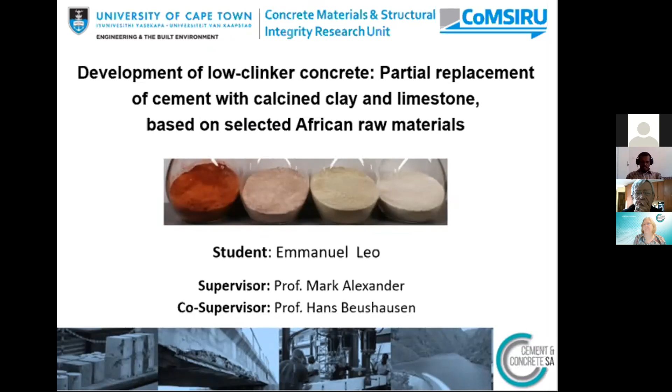So what is LC3? LC3 stands for limestone calcined clay cement. It means a mixture of limestone, calcined clay, and cement.

In the literature, you'll see most people researching a mixture of 50% clinker, 30% calcined clay, and 15% limestone, and of course there's also 5% gypsum. But depending on the required performance of the mix, you can even go down to 40% clinker. And you don't need high-grade kaolinitic clay, a clay with about 40% kaolinite content is usually enough.

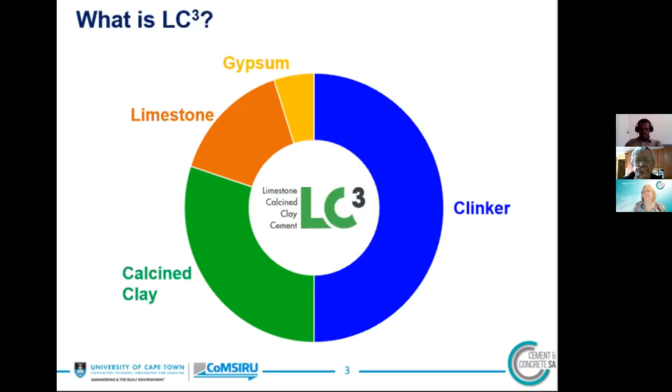So in general, proper preparation and optimization of these constituent materials is important. Otherwise, you may end up having a system with poorer performance than the conventional systems.

So why do we need this system? We all know that the production process of Portland cement generates about 900 kilograms of carbon dioxide per ton of clinker. Fossil fuel combustion is responsible for about 40%, and the decomposition of limestone is responsible for the rest. So for environmental reasons, calcination of limestone must be minimized to reduce carbon dioxide emissions.

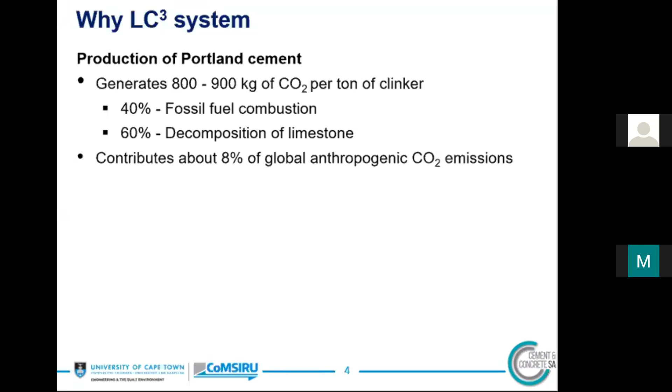Currently, it is estimated that the production of cement contributes about 8% of global anthropogenic carbon dioxide emissions. And about 40% of cement that is produced globally is used to make concrete.

Now, according to the United Nations, the proportion of people in Africa living in urban areas is expected to reach 56% by 2050. So that will result in an immense demand for urban infrastructure, such as bridges, housing, and sewage networks. And most of these structures are usually made of concrete, as it's a relatively low-cost construction material. So this will mean more production of cement and therefore more carbon dioxide emissions.

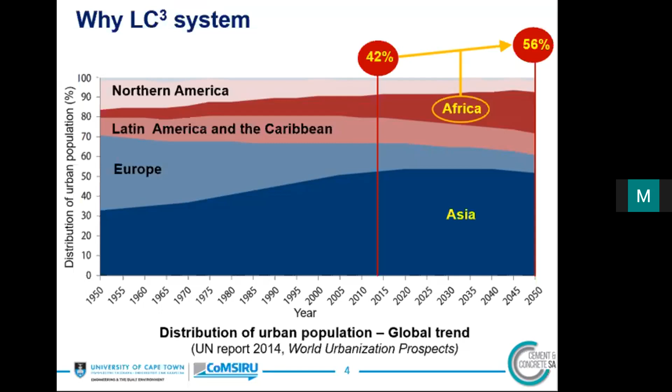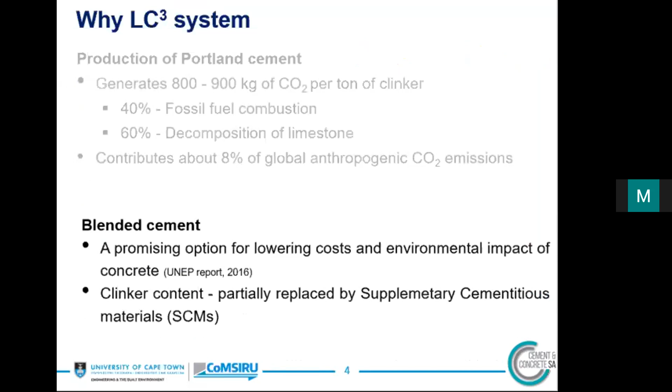Now, the promising option for lowering cost and environmental impact of concrete is through the use of blended cements, which reduce the clinker content in the cement by replacing it with supplementary cementitious material.

Now, the most widely used supplementary cementitious materials, slag and fly ash, are limited worldwide, especially in most African countries. In South Africa, there are large amounts of fly ash generated by burning coal to produce electricity. However, the burning of coal to produce electricity is also another source of carbon dioxide emission.

Now, due to the increasing pressure to reduce environmental emissions, in the long term, the availability of fly ash is also in doubt. Also, the Saldanha Steel Plant in the Western Cape ceased to operate in 2020, meaning that there is no longer furnace slag in that region. So in this case, it is important that we start to think about alternative materials before it's too late.

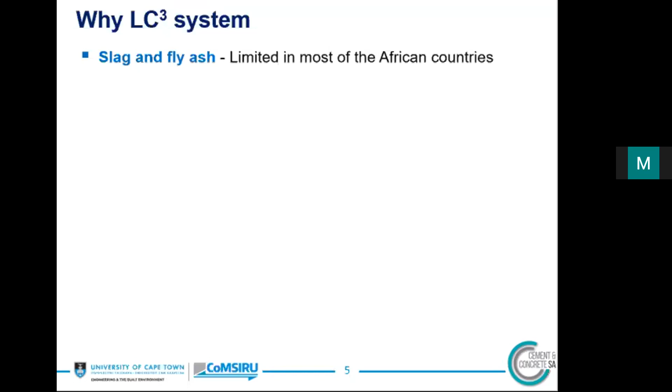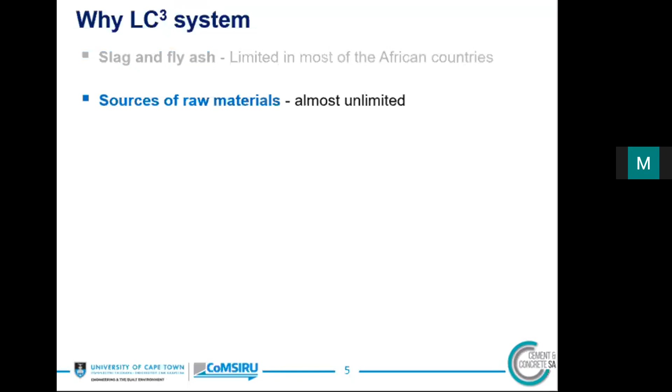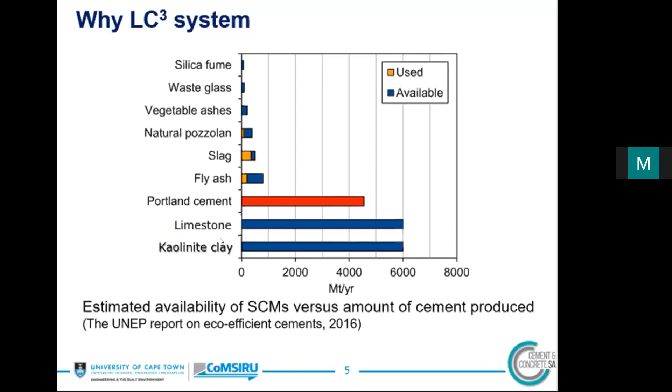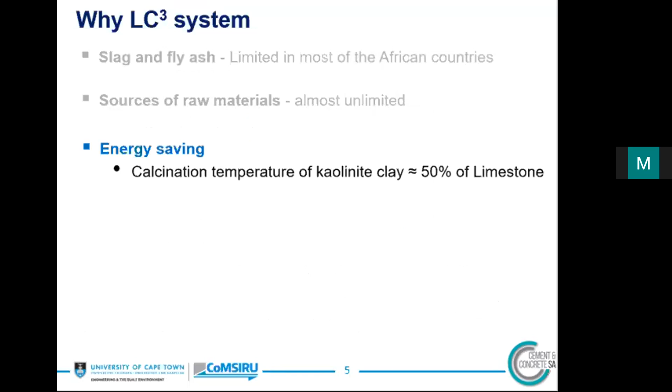Number 3 is about energy saving. Now, in this system, energy saving occurs because the calcination temperature of clays is lower than that of limestone by almost 50%, and they're also easy to grind. There's also a strong chemical synergistic effect when all these 3 materials are combined together, but should be in the right proportions and the right sulfate and alkali content.

So in general, the increased compressive strength and the penetration resistance of this system is linked to the porosity refinement produced by the pozzolanic reaction and formation of carboaluminate phases.

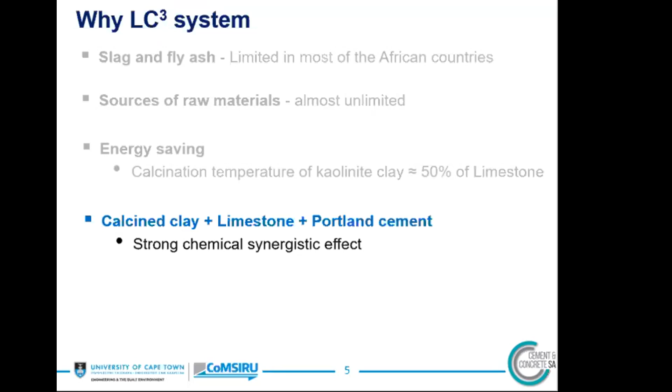Lastly, studies done in India and Cuba show that it can reduce more than 30% of carbon dioxide emission. This is mainly because the burning of kaolinite clays emits only water vapor, unlike limestone, which emits a greater quantity of carbon dioxide during the clinker production.

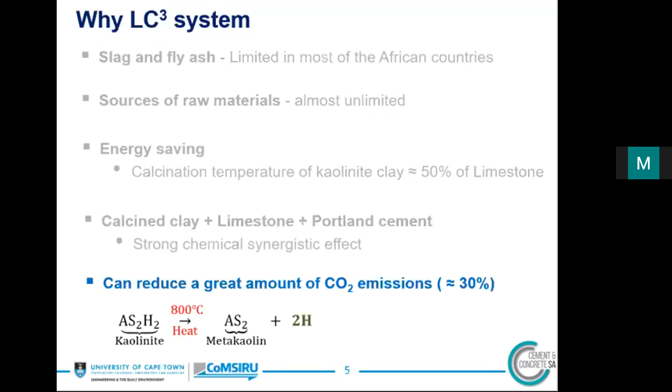So the main objective of this work was to use a performance-based approach in the development of low clinker concrete while maintaining the required properties of workability, compressive strength, and durability for structural applications.

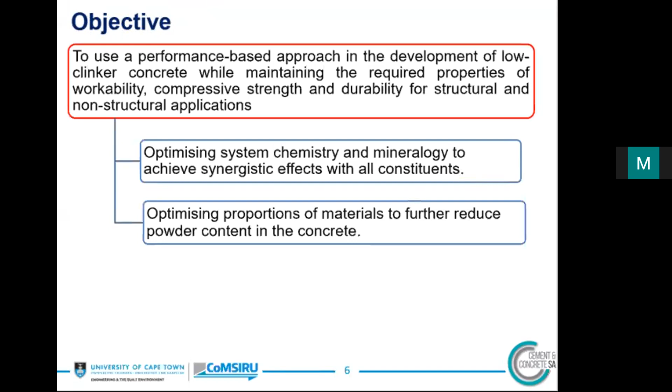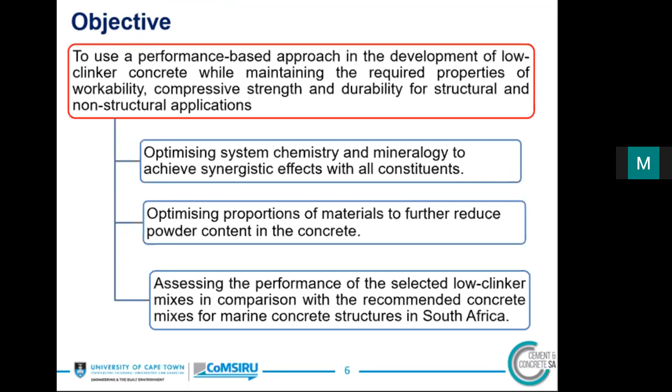Now, to attain the main objective, the study aimed at optimizing system chemistry and mineralogy to achieve synergistic effects with all the constituents, optimizing proportions of material to further reduce powder content in concrete, and assessing the performance of the selected low clinker mixes in comparison with the recommended concrete mixes for marine concrete structures in South Africa.

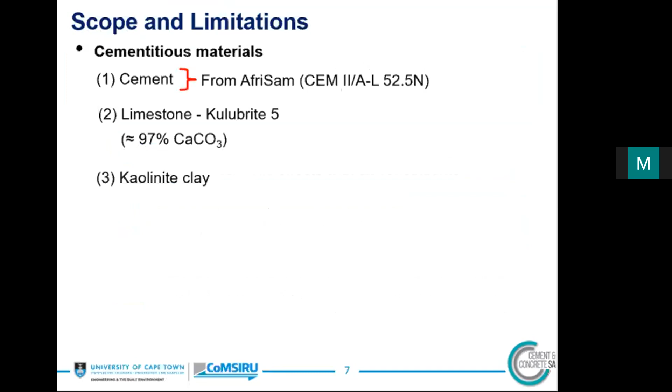The cementitious materials considered in this study are cement, limestone, and kaolinite clay. Cement is CEM II/A-L 52.5N from AfriSam. The limestone is Kulubrite 5 from Idwala Carbonates, which has about 97% calcium carbonate, and there are 2 samples of clay from South Africa and 2 samples of kaolinite clay from Tanzania.

Two water binder ratios were considered: 0.4 to represent relatively high performance concrete from marine environments, and 0.55 on selected mixes to represent medium quality concrete, which can be used in most common construction projects.

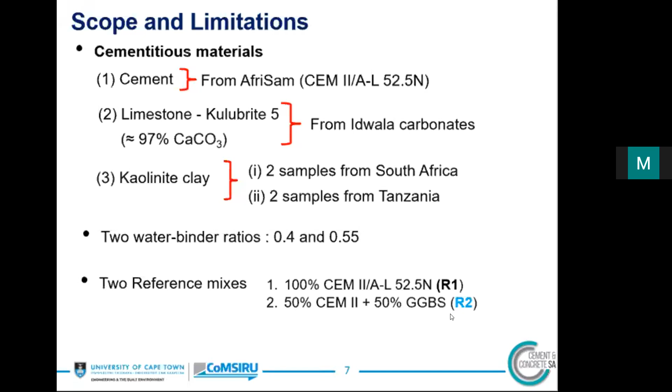Two reference mixes were considered. One is with 100% CEM2, abbreviated as reference 1 or R1. The second mix is with 50% CEM2 replaced by GGBS, abbreviated as reference 2 or R2. A superplasticizer called Optima 175 from Chryso was also used to improve workability.

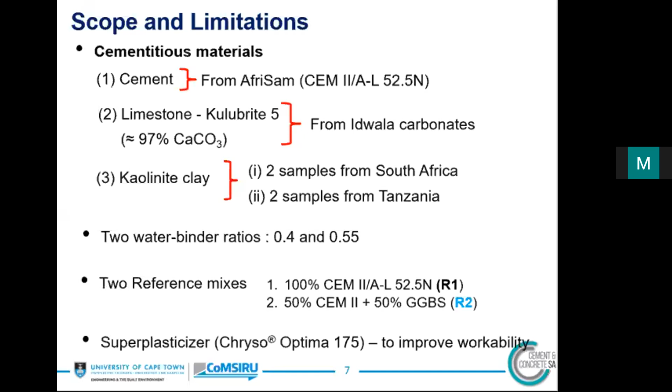The first task was to identify potential kaolinite clay deposits in South Africa and Tanzania and get clay samples from these deposits. Because of the amount of clay at the deposits, the potential ones in South Africa are the Bronkhorstspruit deposit, abbreviated as B clay, the Grahamstown deposit, abbreviated as G clay, and the Hopefield deposit, abbreviated as H clay.

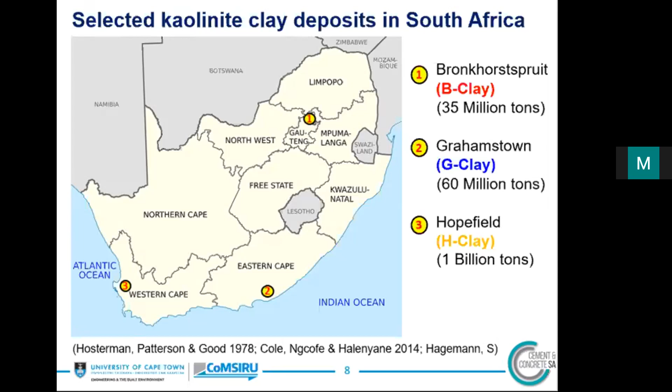This is what the clay samples look like. On the left side, you have samples from South Africa, and on the right side, samples from Tanzania.

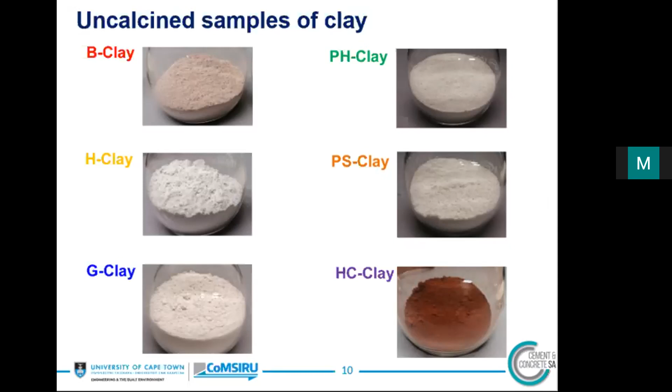The second task was to check the suitability of these clays and the optimal calcination temperature. This involved XRF, XRD, TGA analysis, and also reactivity tests. This table shows a summary of the XRF, XRD, TGA, and calcination temperature results. Basically, a suitable clay is one with alumina content greater than 18%, alumina to silica ratio greater than 0.3, and loss on ignition greater than 7%.

But what's most important is the kaolinite content, which has to be at least 40%. Based on these results, we decided to select B clay and H clay from South Africa, and PH and HC clay from Tanzania for further work.

Something to note here is the equivalent alkalis in the selected clays. You can see the equivalent alkali of the H clay is very high compared to other selected clays, so this will obviously affect the performance of the LC3 mixes with H clay.

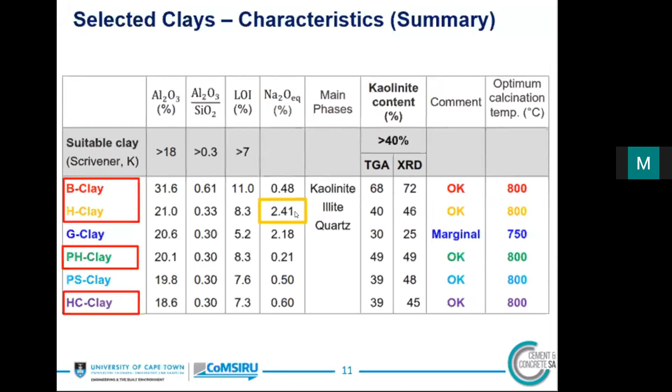This figure and table show the particle size distribution of the selected clays after grinding. The target was to achieve D50 less than 10 microns and D90 less than 30 microns before calcination. But during calcination, the particles tend to agglomerate, which is why you see an increase in particle size.

Another important parameter is the BET surface area of the clay. The surface area, which includes the internal surface area, was estimated using the Brunauer-Emmett-Teller equation based on nitrogen gas adsorbed on the surface of the clay, using an instrument called TriStar. This surface area also gives an idea of the internal surface area of the clay, especially if you have similar particle size distribution.

It's clear here that HC clay has the highest internal surface area compared to other clays, and H clay has the lowest. So in this case, a mix with HC clay would demand more water or more SP to achieve a similar workability.

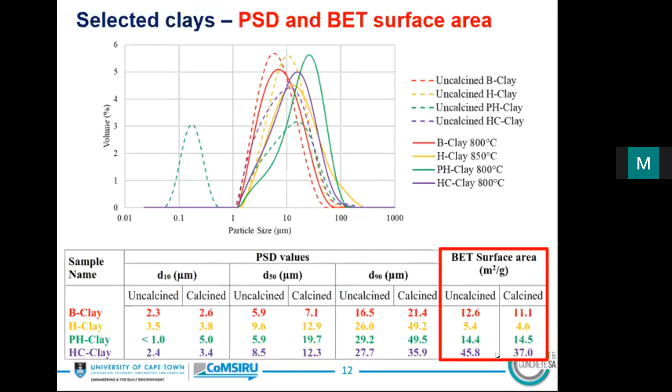The next task was to get optimal proportions of these materials. Here, the compressive strength of mortar was used as the performance metric for optimization. LC3 mixes with clinker levels between 40 and 70% were obtained using the mixture design three-factor approach. In this approach, the simplex shape is a triangle, and it's possible to come up with contour lines within the triangular regions, as shown in these diagrams, to estimate proportions that give the best performance.

This system requires adjustment of sulfate and alkali content. Sulfate is adjusted due to the filler effect of the added supplementary cementitious materials, in this case calcined clay and limestone. To get full benefit of the reaction of both silicate and aluminate phases, adjustment was done by ensuring the aluminate reaction peak occurs shortly after the silicate reaction peak, between 13 and 18 hours.

This was done using an isothermal calorimeter available in our lab. Alkali content is adjusted to increase the early strength, while ensuring the long-term performance of the mix is not affected. Literature suggests a value between 0.6 and 0.8%. In our case, we decided to select 0.7%.

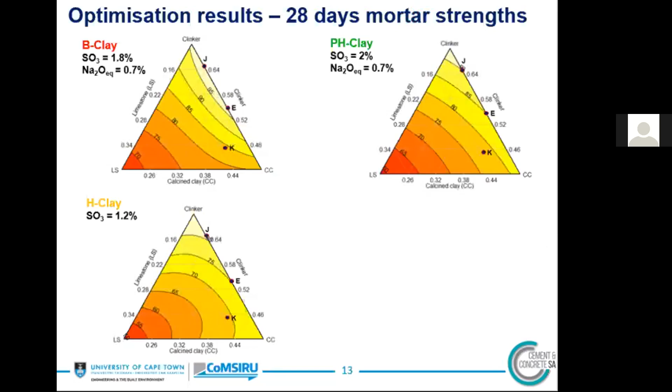Now, with these two adjustments, sulfate and the alkali content in all the mixed proportions, it's only now the amount of clinker, amount of calcined clay and limestone that control the reaction. This figure shows optimization of results at 28 days. You can also see the required sulfate for each of these mixed proportions.

For mixes with B clay it was 1.8%, with PH clay 2%, but H clay was only around 1.2%. The equivalent alkalis were maintained at 0.7% by adding sodium hydroxide, but it was not possible for mixes with H clay because the alkalis in H clay were already high. So what you see inside here are the compressive strength results of the LC3 mortars relative to the reference mix with 100% cement.

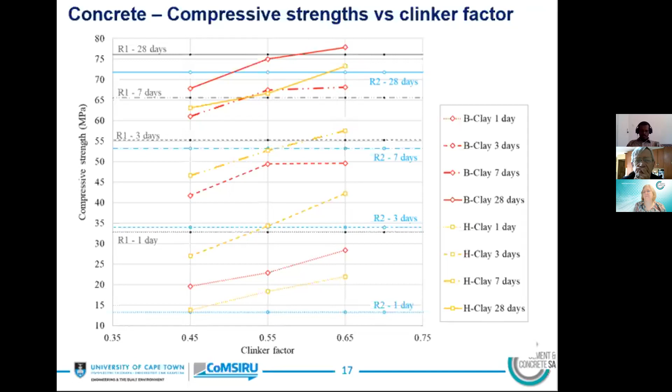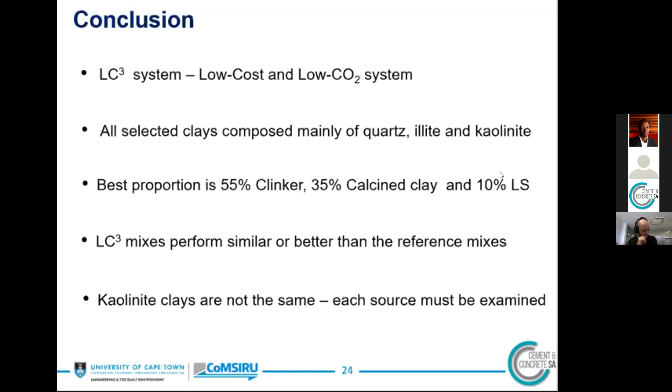This clay we received was already flash calcined by the supplier, Cowling Group. So we received it already calcined and had to use it directly. But when we tried, because they also gave us a small sample of raw clay, we also tested it at 800 to check the activity. But the activity was similar, almost the same.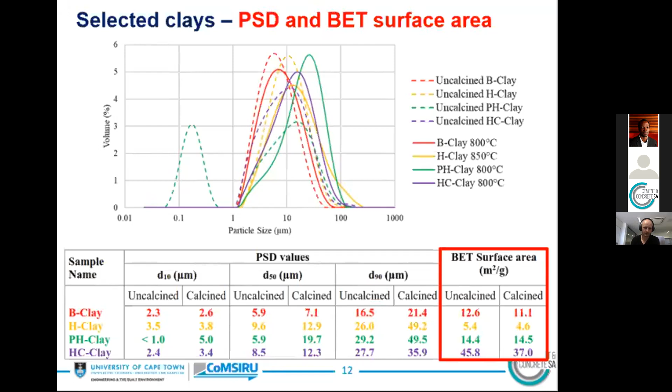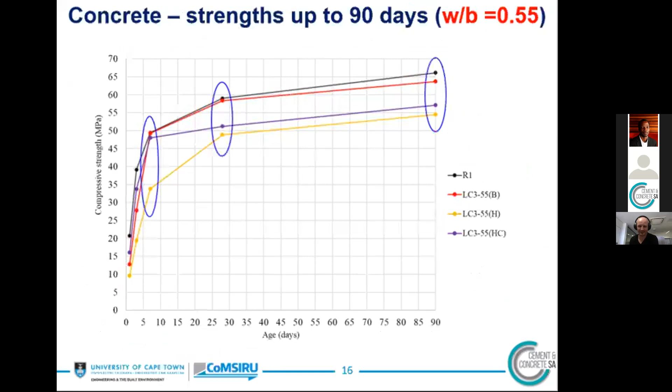Okay, in slide number 18, Emmanuel. 18. Nick, if I'm taking too much time, you can let me know. No, that's fine.

Now, can you please tell us, you say that the porosity values on the lower right-hand side for your LC3s are lower than that of the reference mix, but that's not the case in terms of interpretation if you look at the water sorptivity. Why is that so? The porosity of the reference mix is relatively higher than that of the LC3 mixes, but on the other hand, the water sorptivity index for the reference mix is lower than that of the LC3 mixes. How do you combine these two parameters?

If I have to be conservative in answering that question, I'll just rely on the porosity results, because the sorptivity values involve a lot of errors when you do that testing. But generally it gives you an idea of how your specimen absorbs water, how water gets absorbed when your specimen is exposed to water. So I think I'll just generally rely on the porosity results.

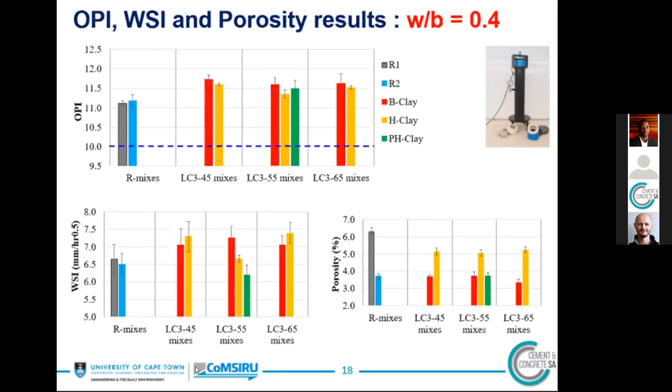Now, don't you think this brings into question the validity of these results in terms of the edge effect? I don't know whether you've considered the edge effect in terms of resistance measurement - edge as in E-D-G-E, not A-G-E, I can't differentiate the pronunciation of these two.

So you're saying that there must be an error, but if there's an error, then it is maintained throughout testing of all the specimens. That's a very risky statement to make, that even if there's an error, it's still the same in all of them.

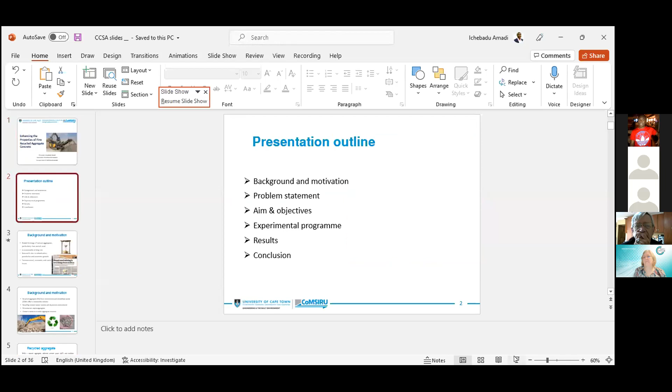Sorry, is my slide moving? No, it doesn't look like it, it looks like it's frozen. Just press enter on your keyboard. I've done that, nothing. Let me start sharing again. Is it better now? Yeah, we can see.

Sorry about that. So here's an outline of my presentation. I'll start with the background, talk about the problem statement and aim and objectives, the experimental program, discuss some of the results so far, and then I'll conclude.

There is a global shortage of natural aggregates, particularly river sand and pit sand. This is because sand is mined at a rate that presently exceeds the rate at which sediments are deposited by all the rivers of the world. It is estimated that about 40 to 50 billion tons of sand is extracted from the earth per annum.

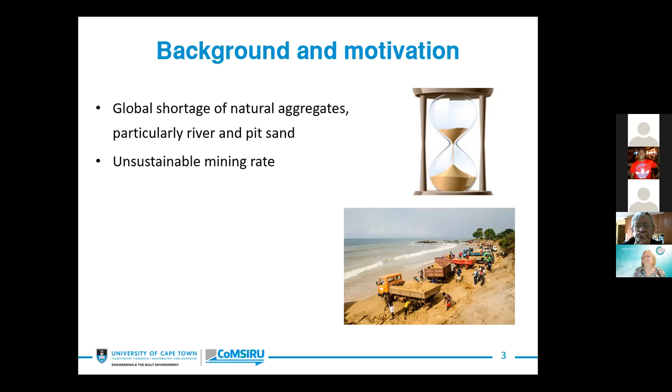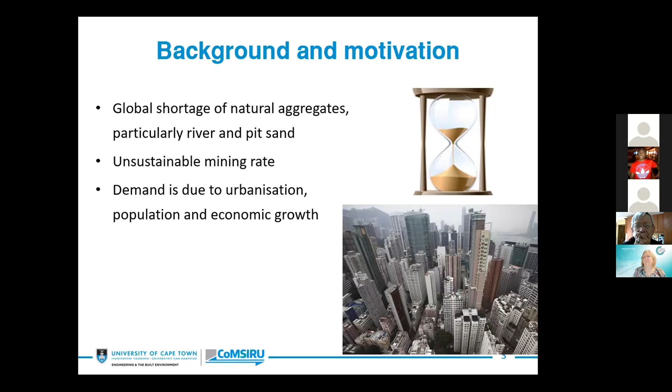A significant portion of this goes into cement and cementitious materials production, that is concrete and mortar. The demand for concrete and mortar is fueled by urbanization, population growth, and economic growth. Of course, this high demand has come at a huge cost, as it has created environmental and socioeconomic issues, which include loss of biodiversity, coastal erosion, and in some cases, sand wars.

One way of sustainably addressing these issues will be the use of recycled aggregates from the concrete component of construction and demolition waste. Some benefits of recycled aggregates include waste reduction, especially as landfills have become scarce, particularly within the Cape Town context. Another benefit is conservation of natural aggregate resources, environmental protection, and of course, job creation as well.

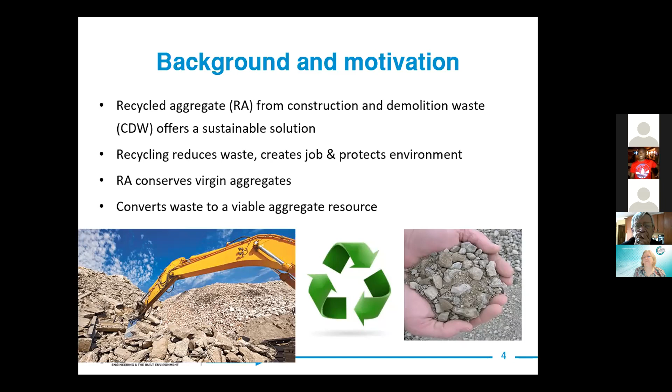Here's a picture of recycled aggregates. Recycled aggregates can be idealized as constituting virgin aggregate and old adhered cement mortar. The old adhered cement mortar comes from the old concrete that was crushed to produce the recycled aggregates. Between the old adhered mortar and the virgin aggregate, there is an interfacial transition zone. The old adhered mortar looks porous and is less stiff than the aggregate component. For this reason, recycled aggregates usually have high water absorption, and they are usually less stiff and less dense than conventional or natural aggregates.

When this recycled aggregate is used in the production of new concrete or mortar, there's a new cement paste that bonds with the recycled aggregate, and this creates more ITZs. As we know, the existence of multiple ITZs can impact durability as the transport properties of concrete are raised.

The challenge of recycled aggregate is more with fine recycled aggregates than coarse recycled aggregates. This is because the adhered mortar is significantly more in fine recycled aggregates than coarse recycled aggregates. As a matter of fact, the percentage of adhered mortar increases as aggregate size reduces.

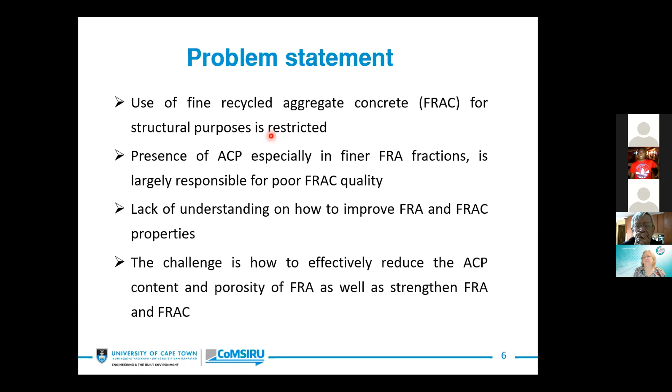Now, the aim of this research will be to investigate procedures to enhance properties of FRA for structural application in concrete production as a large-scale replacement for natural sand resources.

Here are some objectives of this study. One would be to improve FRA quality by reducing the overall ACP content through the systematic replacement of FRA particle sizes less than 1.18 with natural sand.

Secondly, we want to also reduce the porosity and strengthen FRAC through the use of supplementary cementitious materials, as well as compare the effects of these different supplementary cementitious materials on the concrete properties, to investigate the underlying mechanisms that result in the changes in porosity and microstructure of FRAC and the effect of these changes on FRAC quality.

Then we also want to look at how to optimize FRAC performance using different procedures such as mix design, mix procedure, and of course, curing. Then finally, we want to also determine the effect of different FRA replacement levels on concrete properties.

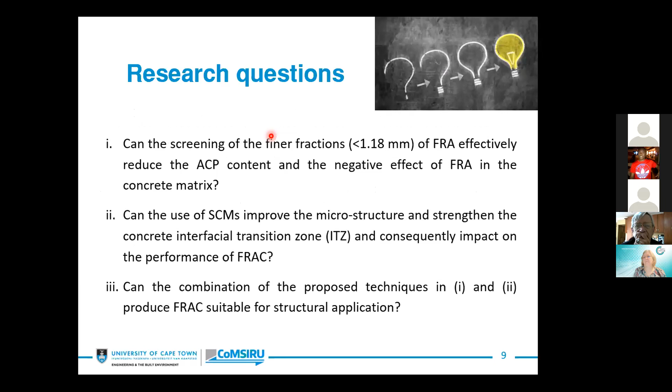Now, here are some research questions, but the underlying research question here is that, can a combination of screened aggregates and the use of supplementary cementitious materials produce fine recycled aggregate concrete suitable for structural application? To investigate this,

Here are some variables and parameters that have been listed for these studies. Now we have two water binder ratios, that is 0.45 and 0.55. These water binder ratios represent typical water binder ratios used for structural concrete application.

Of course, I've mentioned two FRA sizes. So the screened one is listed as FRA1 and the second one is FRA2. Then we also want to look at three different supplementary cementitious materials, namely fly ash, GGBS, and limestone calcined clay, which my colleague just talked about.

But for the purpose of this presentation, we shall be focusing on fly ash and GGBS. And the fly ash and GGBS will be used at 30% and 50% replacement levels, respectively. Of course, these are adopted from industry replacement levels. Then, of course, fine aggregate replacement levels will be investigating 0, 25%, and 50%.

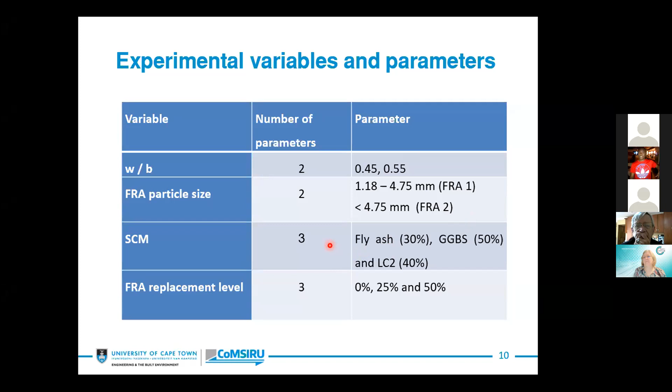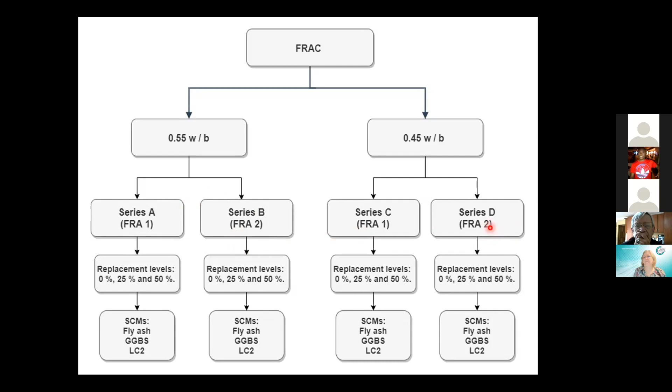Here is a flowchart of this research. Just for emphasis, Series A and Series C mixes will have screened aggregates, while Series B and Series D mixes will have unscreened aggregates, that is everything less than 4.75 millimeters.

Now, for the purpose of this presentation, we shall be limiting our discussions to general materials characterization. We shall also be talking about the compressive strength and elastic modulus, just as a representation of the mechanical properties. Then for durability properties, we shall be looking at the DI test, which is the OPI, the CCI, and the WSI.

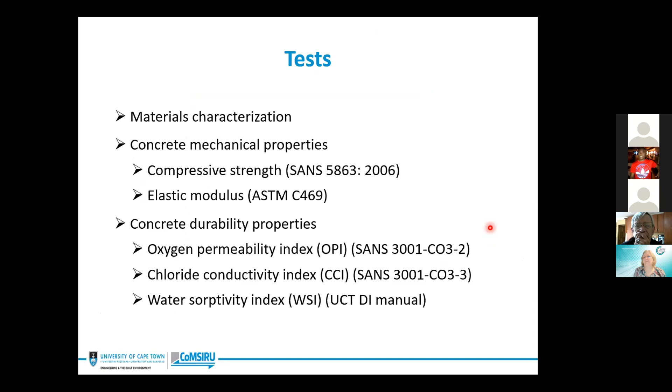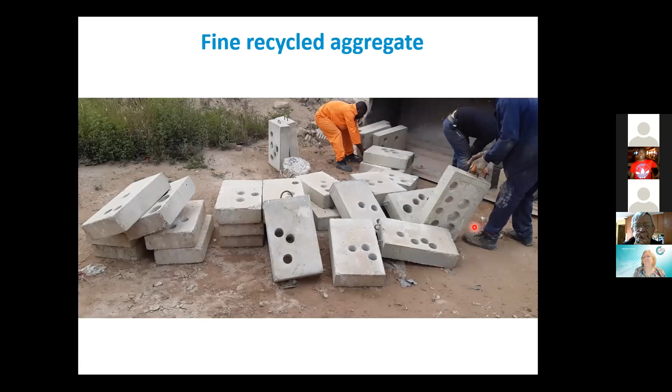You can see the coring there. And some of them were tested, and these are just a representation of the average strengths. So we can see that the strengths typically vary between 37 megapascals and 75 megapascals.

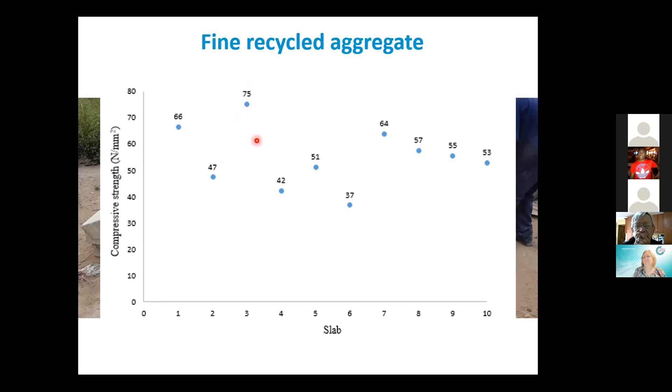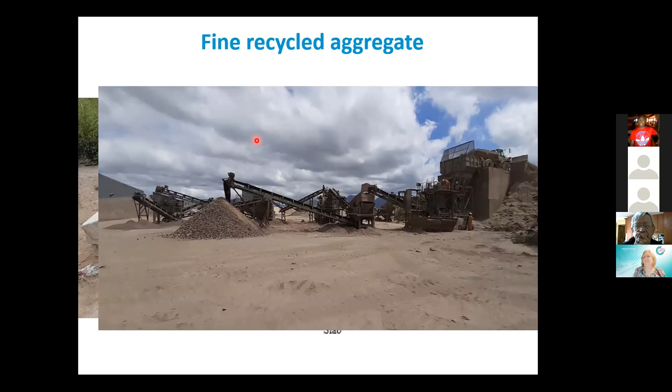This is what my materials look like after crushing. And of course, after processing, after sieving, these are the two fine recycled aggregate samples that were used.

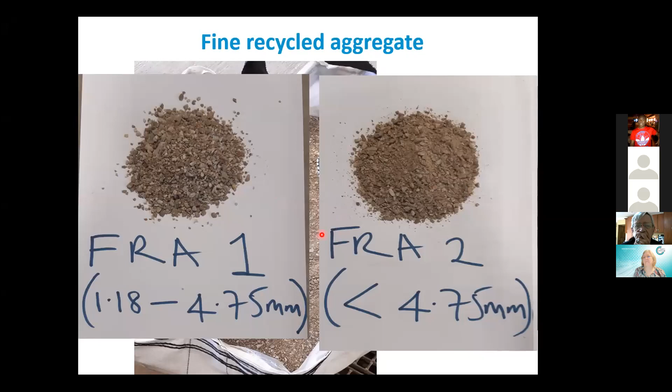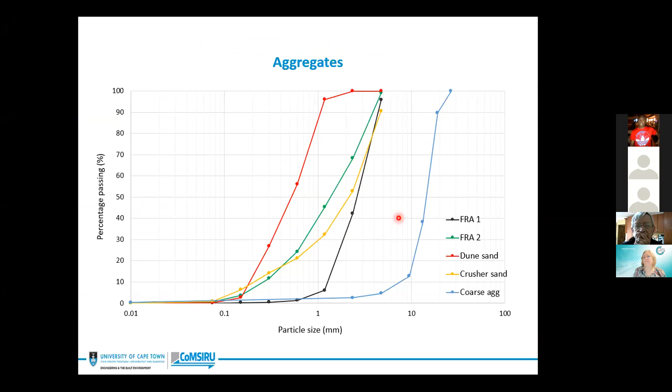Of course, our materials had to also be characterized by grading. And here is a look at all the fine aggregates that were used, both natural and recycled aggregates. And of course, this is the coarse aggregate, which is the natural coarse aggregate, the Greywacke stones.

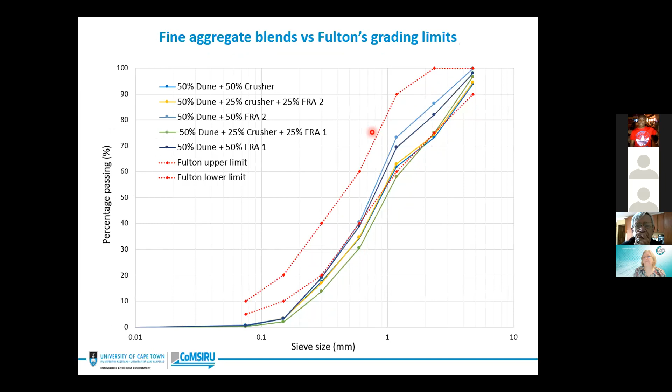We also checked them against the grading limits that were stipulated in Fulton's textbook. It is observed that the aggregates do not entirely fit in here. This is because the Fulton limit is narrower and has a finer grading than the ASTM limits.

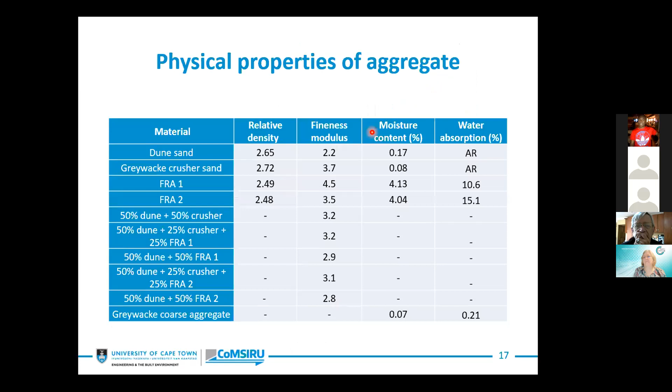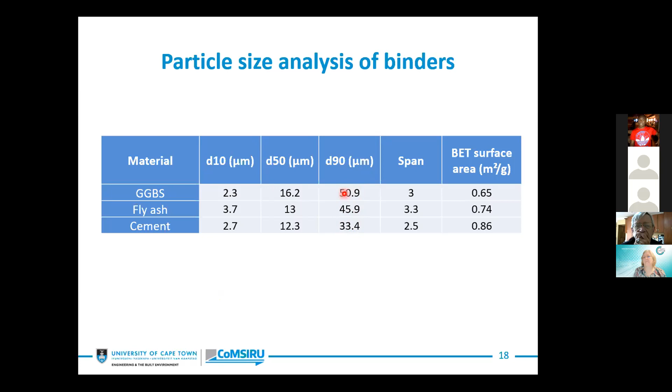Here are some properties of aggregates measured in the lab: fineness modulus, moisture content, and all of that. Some of these were used for the mix design. For our binders, we did some basic characterization like particle size analysis, and we can see that all of our binders do not exceed 51 microns for the D90 sizes. Our BET surface area is also given there. Here's a graphical representation of what our sieves, our binder sizes, look like.

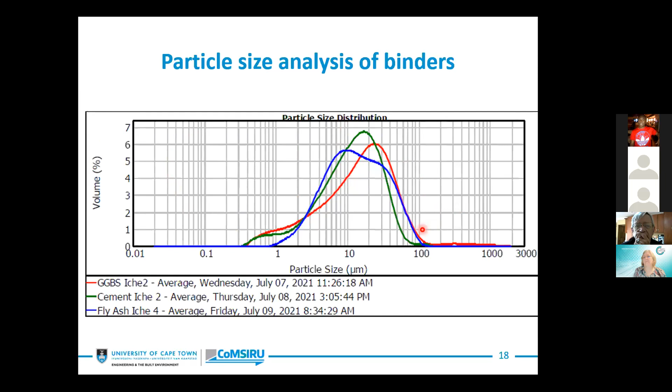The mixing procedure adopted for this study is a modified version of the two-stage mixing approach developed by Tam et al. The procedure basically involves pre-mixing aggregates in water and pozzolanic slurry to provide more interaction between the recycled aggregates and the binder. Studies have shown that this procedure enhances pore filling and increases pozzolanic reaction. Also, premixing allows fine recycled aggregates to take up moisture without getting to saturation within a few minutes. Literature has shown that some 60 to 70% degree of saturation is required for optimum recycled aggregate concrete performance.

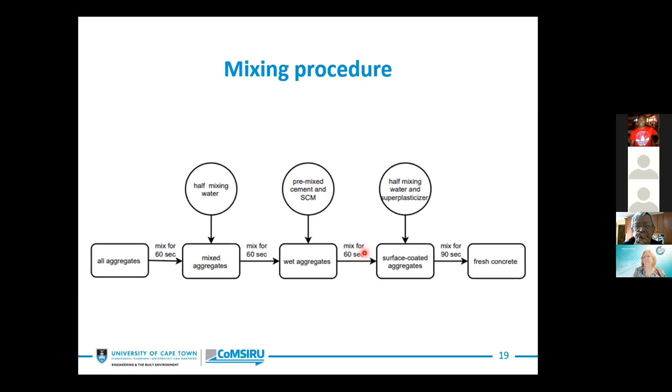For our mixes, we have also used superplasticizers to achieve our design workability, which was fixed at 75 plus or minus 25 millimeters. The SP dosage is kept at minimum to limit any influence of SP. Also, no additional water or water reduction was carried out during this mixing.

So here, just a quick look at some of our results. Here's the compressive strength result. Results of the compressive strength basically show that for our screened FRA concrete, at 0.55, it can be seen that the strength decreases as FRA content increases. There's this general trend here, which can be attributed to the different replacement levels of FRA, and to the adhered cement paste that is present in the FRA matrix.

But this trend obviously is not the same with 0.45 water binder ratio. This could be due to the high absorption rate of fine recycled aggregates, which may have absorbed some of the mixing water, thereby decreasing the water cement ratio within the binder matrix, and therefore giving rise to higher strength. You can see from the results that the unscreened mixes like the D25P and the D50P, which have high FRA absorption, gave us good strength compared to their corresponding mixes.

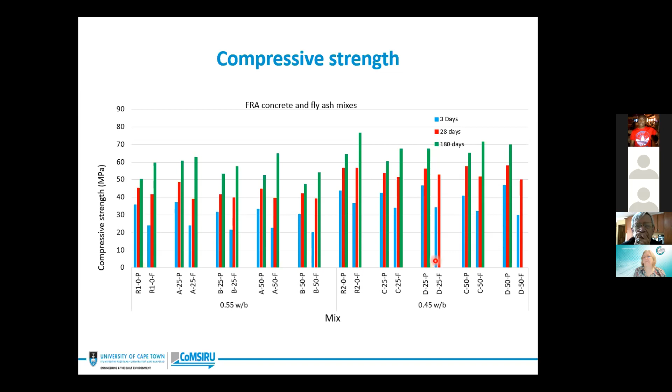Now for the mixes with fly ash, it can be seen that at 3 days and 28 days strength, fly ash mixes give less strength than their corresponding mixes without fly ash. But after 6 months, the strength of fly ash mixes increased steeply higher than their corresponding mix. This is indicative that fly ash requires more curing time to hydrate. The increase in strength is more pronounced in unscreened FRA mixes, which may indicate more pozzolanic reaction between the calcium hydroxide reserve and the silica present in fly ash.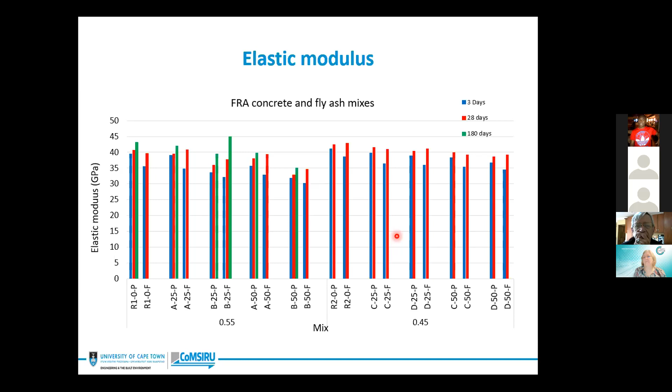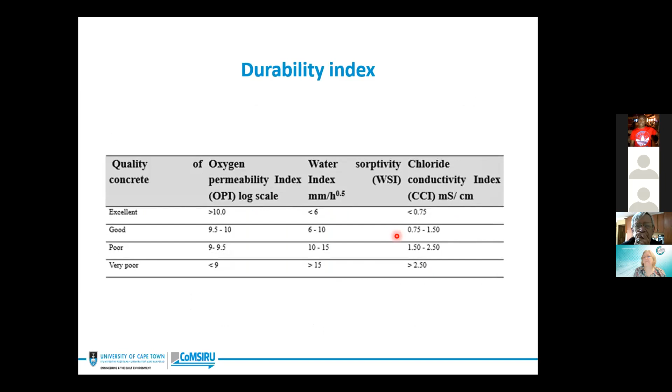A similar trend is observed for fly ash and GGBS mixes. For durability properties, we shall use the 3DI test as mentioned earlier, the OPI, CCI, and WSI. As a guide, here are some values that give an indication of concrete quality for these tests.

Now, the OPI values for all the concrete mixes are above 10, indicating that the concrete is of excellent quality on the basis of OPI. We can see that the OPI values reduce as FRA content increases. You can see that trend, which indicates that porosity and penetrability of concrete increases with increasing FRA content.

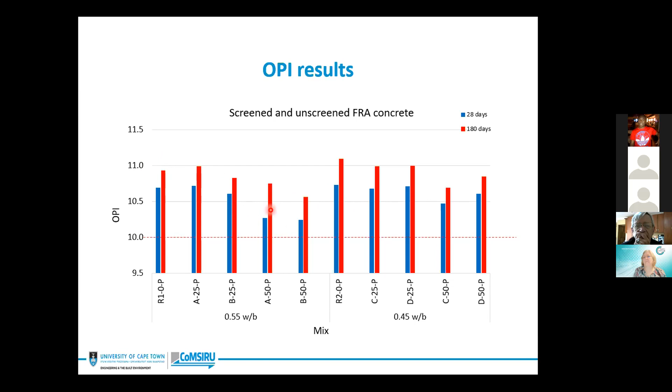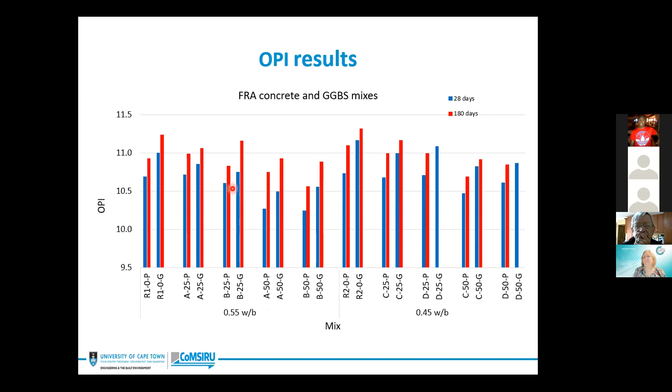For CCI results, we can see that the concrete quality lies between good to excellent, particularly for the 0.45 mixes. This is due to their low water content and therefore denser microstructure.

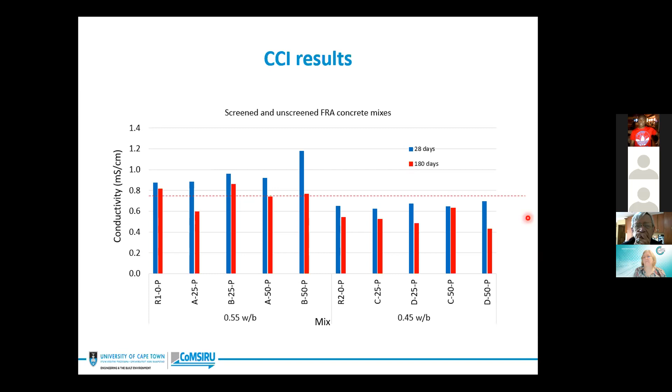For GGBS mixes, the CCI values improved significantly at 28 days. This can be attributed to the good chloride binding ability of GGBS.

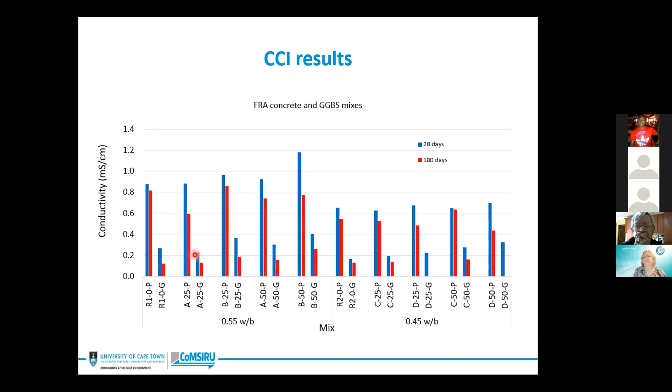For WSI results, we can see that all the concretes fall within good to excellent quality concrete, particularly the 0.45 mixes. We can attribute that to the denser microstructure and less porosity of these mixes.

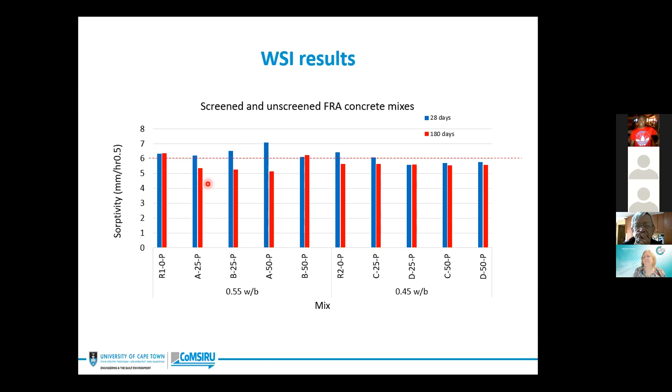Results also show that prolonged curing is beneficial to the 0.55 mixes, as we can see a decline in the sorptivity values from 28 days to 180 days of curing. This can be attributed to a better microstructural development over a longer curing period.

This is quite interesting, as it does not agree very well with literature, because literature tells us that it is expected that concrete with a high FRA content will increase porosity and its interconnectedness, and therefore more capillary water sorptivity. However, this is not the case here.

To gain a better understanding of these results, I am presently looking at studies by Mo, Bakera, and Prof. Mark Alexander, 2021, a paper where they stated that WSI results must be analyzed alongside the porosity values obtained from the test.

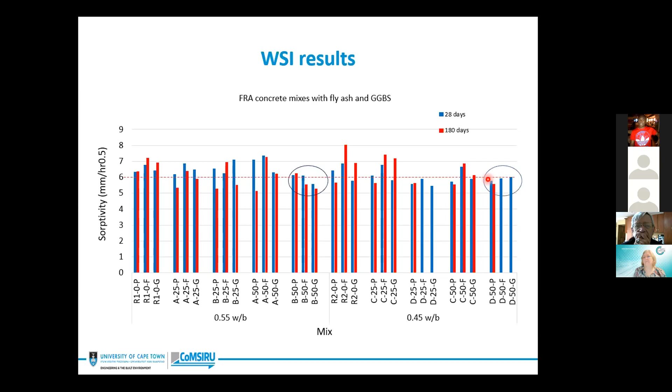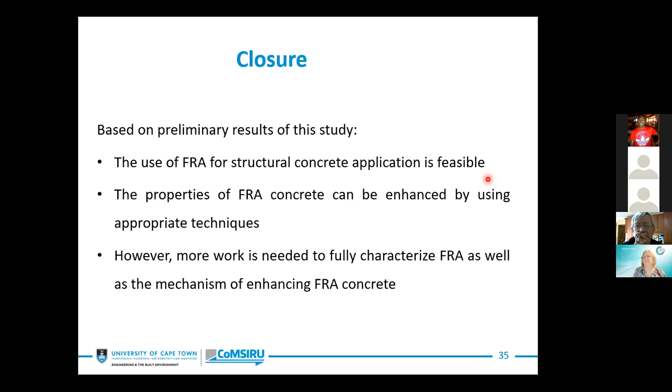It is on this note I want to conclude with the following remarks: based on preliminary results of this study, the use of FRA for structural concrete application is feasible. The properties of FRA concrete can be enhanced by using appropriate techniques. However, more work is needed to fully characterize FRA as well as the mechanism of enhancing FRA concrete. Thank you.

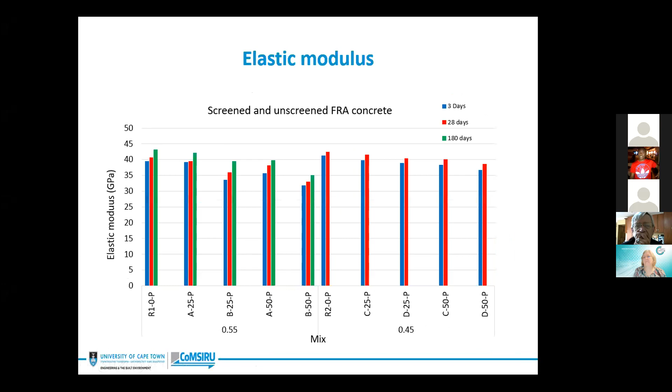Thanks very much, Mr. Chair, for that talk. A lot of data and testing seems to have gone into your research so far. So yeah, it's quite a lot of data to sift through. I think let's open up the time for questions. We can only have enough time for maybe 1 or 2 questions.

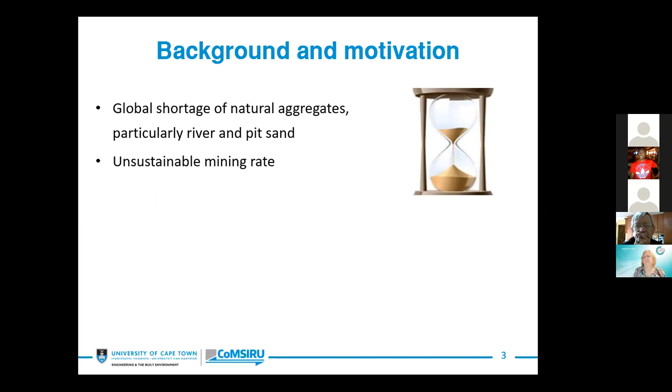Mike, you have a question? Yes, please, Nick. Thanks, and thanks Iche for your good presentation. Thank you, Prof. One of your objectives or aims was, can you please go to that slide? I remember well. For the previous slide, please.

So based on this aim and based on what you've done, the results you found and conclusions you've arrived at, can you please comment on the reproducibility of using FRA the way you used it in practice?

Okay Prof, the reproducibility of this material. One thing we know about recycled aggregates generally, particularly fine recycled aggregates, is the variability in quality. So it is important that we characterize these materials adequately. A lot of characterization work is ongoing. Of course, I can't represent everything in this presentation, and it is based on that we can start talking about reproducibility, and that's my own thinking.

Okay, thank you, that's all from me, Nick. Thanks, Mike. Does anyone else have any questions for Iche? Okay, there's no questions in the chat. So we're just about nearly about to hit 4:05, so we've actually gone a little bit over time that we've allowed for.